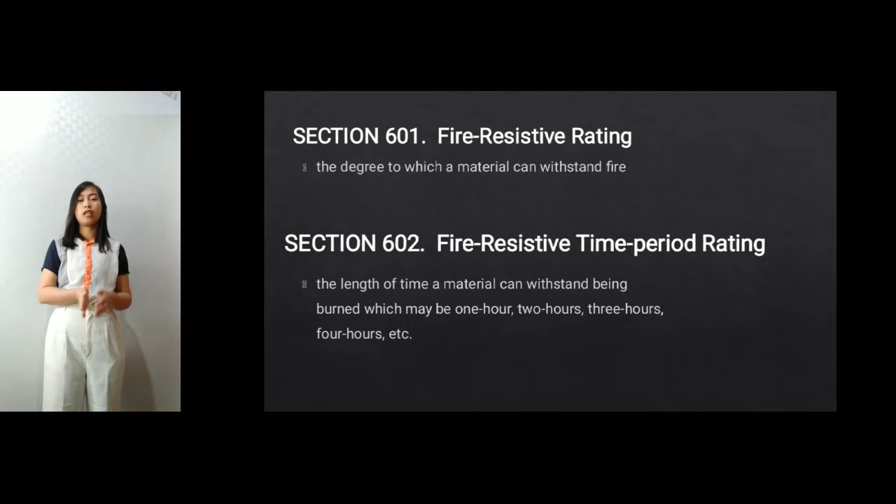In Section 603, fire resistive standards: what are the standards of the fire resistive method? All materials of construction and assemblies, or combination thereof, shall be classified according to their fire retardant or flame spread ratings. This is also determined by generally accepted testing methods and/or by the secretary or the building officials of the Philippines.

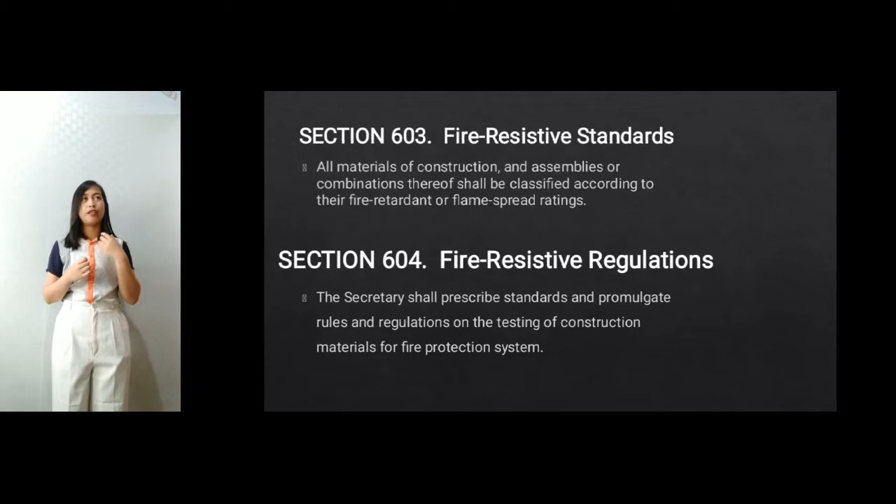Section 604 is the fire resistive regulations. This section states that the secretary shall prescribe standards and promulgate rules and regulations on the testing of construction materials for fire protection systems. We also have the Fire Code of the Philippines, which is a separate document that states all the standards and testing methods that should be followed in the Philippines when we talk about fire safety.

How about passive fire protection? It is often not noticed, but it is a critical element in fire protection. Passive fire protection consists of elements utilized to keep a building safe so fire doesn't spread, and no action is needed for it to work. These systems are built inside the building, usually consisting of fire resistant floors and walls.

Let's move on to Chapter 7. This chapter talks about the classification and general requirement of all buildings by use or occupancy. Before we proceed, let us first know what are the classifications of buildings by occupancy.

There are different occupancies that a building can have: group A, B, C, up until group J. Group A is for residential dwellings. Group B is for residentials, hotels, and apartments. Group C is education and recreation. Group D is institutional. Group E is business and mercantile. Group F is industrial. Group H is assembly other than group I, and Group I is assembly with occupant load of 1,000 or more, and Group J is for accessory buildings.

Is it allowed to change the occupancy use of a building? What does it mean? It means that when a certain building has a certain occupancy, is it allowed to change that occupancy to another one? For example, group A to group J.

Section 702 states that no change shall be made in the character of occupancy or use of any building which would place the building in a different division of the same group of occupancy, or in a different group of occupancy, unless such building is made to comply with the requirements of this code for such division or group of occupancy. This means that if a building is designed to be residential, it should function as a residential building. It should not function as an industrial, mercantile, or accessory building.

However, if a change must be applied in the building, it should comply with the requirements given by the secretary or the building officials.

Next is mixed occupancy in section 703. What is mixed occupancy? There are different subcategories under mixed occupancy, section 703. First is the general requirements: the whole building shall be subject to the most restrictive requirement pertaining to any type of the occupancy. So it would be possible to mix the occupancy of the building.

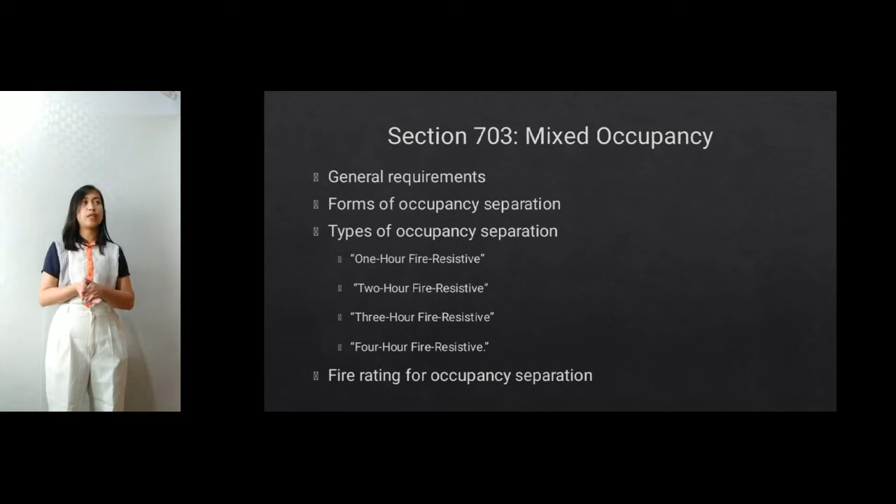Now, fire rating for occupancy separation. Where any occupancy separation is required, the minimum shall be a 1-hour fire resistive occupancy. So if a different part of a building is adjacent to another part of the building that has another occupancy, there must be a separation between them, and that separation should have a minimum fire rating of 1-hour fire resistive occupancy separation.

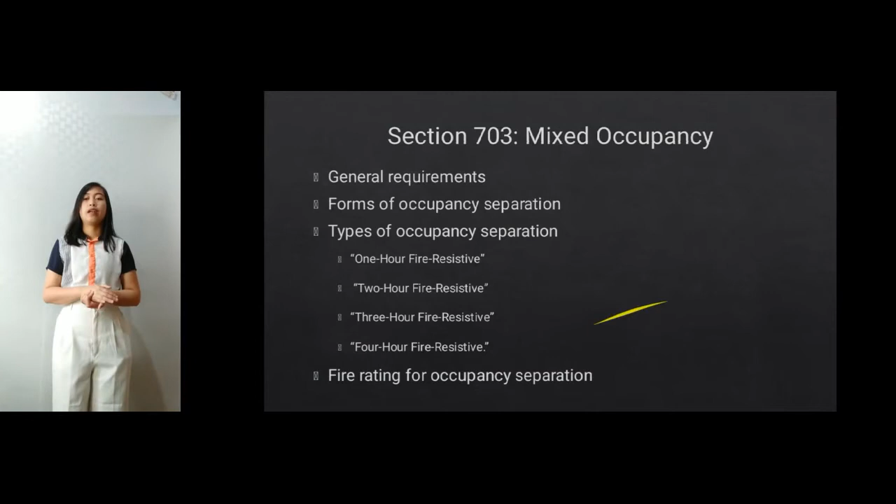Okay, so next is section 704, the location on property. In general, there has to be direct access to a public space, yard, or street on at least one of its sides. So a property must have direct access to public space.

Eaves over required windows shall not be less than 750 millimeters from the side and rear property line. Eaves are the border of the roof, so the distance between the border of the roof and the property line must not be less than 750 millimeters.

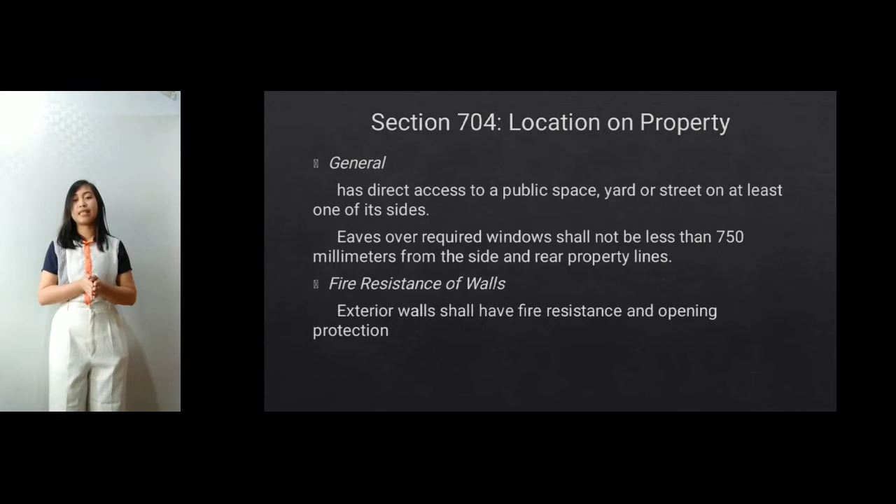Next is fire resistance of walls. Exterior walls shall have fire resistance and opening protection. When openings in exterior walls are required to be protected due to distance from property line, the sum of the areas of such openings in any story shall not exceed 50% of the total area of the wall in that story.

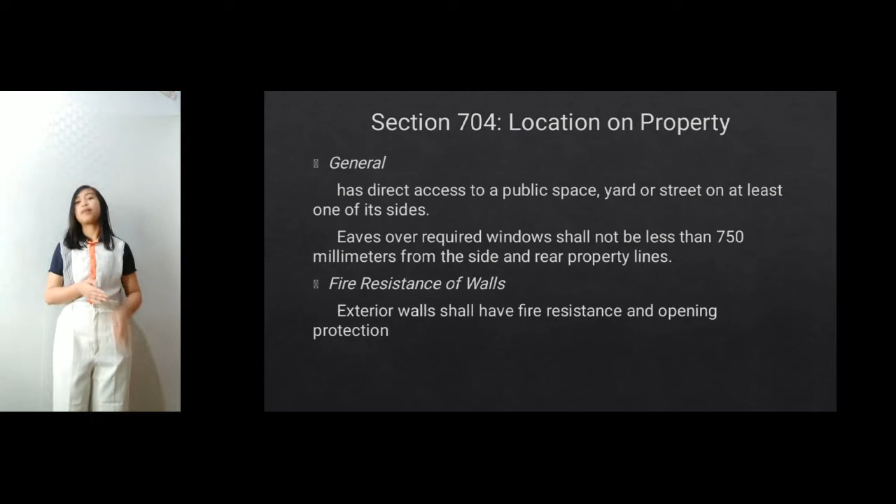Also under location on property: buildings on same property and buildings containing courts. If you will be designing these types of buildings on the same property, court walls shall be assumed to have a property line between them. So you should have a clear property line on your property, setting a clear separation to the property beside yours.

Next is section 705, the allowable floor areas. The allowable floor areas depend on the occupancy and type of buildings, as set by the secretary, and the allowable floor area increases according to the building code. This should also comply with the requirements of the secretary.

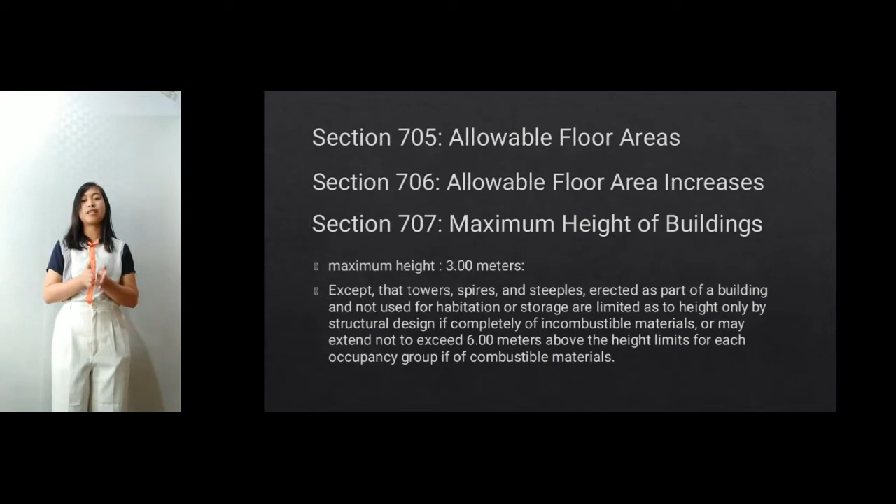In section 707, the maximum height of buildings shall be 3 meters, with an exception: towers, spires, and steeples erected as part of the building and not used for habitation or storage are limited as to height only by structural design if completely of incombustible materials, or may extend not to exceed 6 meters above the height limits for each occupancy group if of combustible materials.

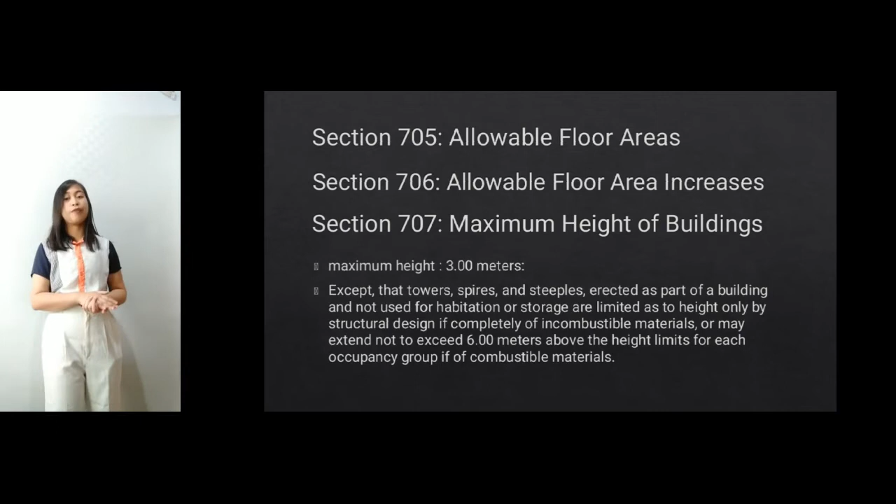So it simply states that if it's not for habitation or storage, you can exceed your maximum building height according to your structural design, provided that it should be made of incombustible materials as given in the code.

Section 708 covers the minimum requirements for Group A dwellings. Group A dwellings are the most commonly used - the majority of construction in the Philippines falls under Group A dwellings or residential. So we should know the minimum requirements for it.

For dwelling location and lot occupancy, this should be less than 90% for a corner lot, less than 80% for an inside lot. For easements or setbacks, there should be at least 2 meters from the property line.

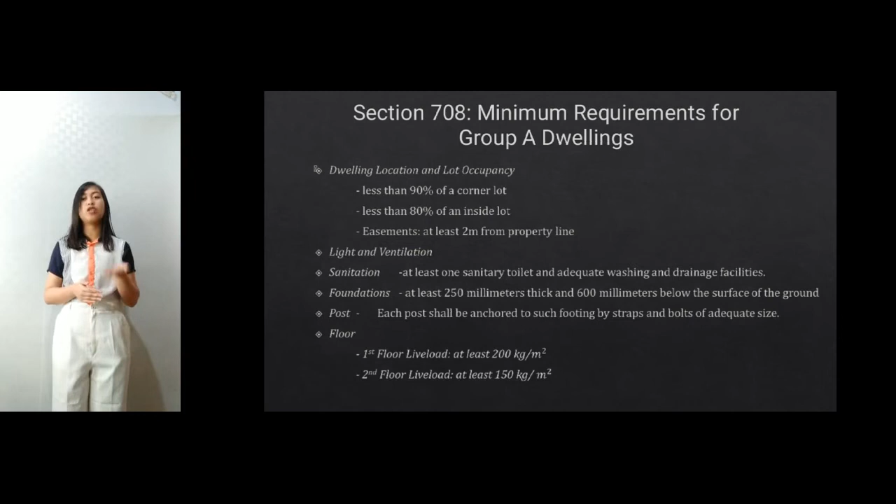For light and ventilation, we will discuss that more in chapter 8. For sanitation, there should be at least one sanitary toilet and adequate washing and drainage facilities.

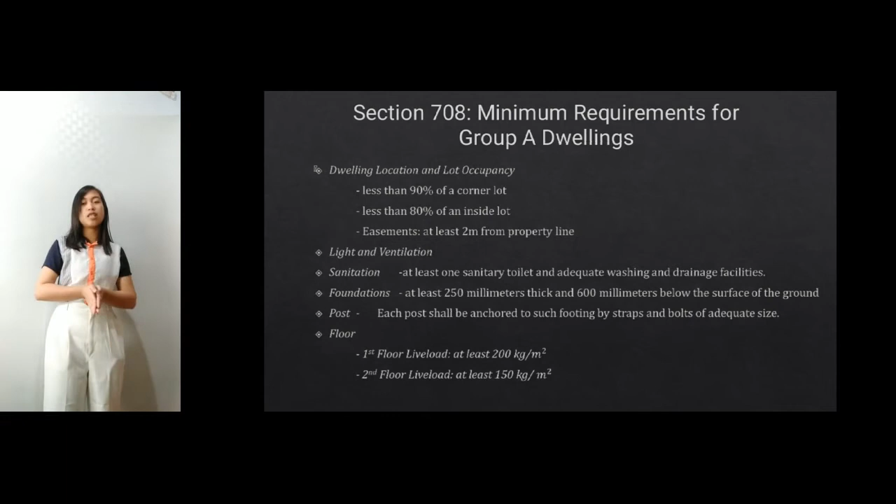For foundations, at least 250 millimeters thick and 600 millimeters below the surface of the ground. For posts, each post shall be anchored to such footing by straps and bolts of adequate size. For floors, the first floor live load must be at least 200 kg per square meter, and the second floor live load at least 150 kg per square meter.

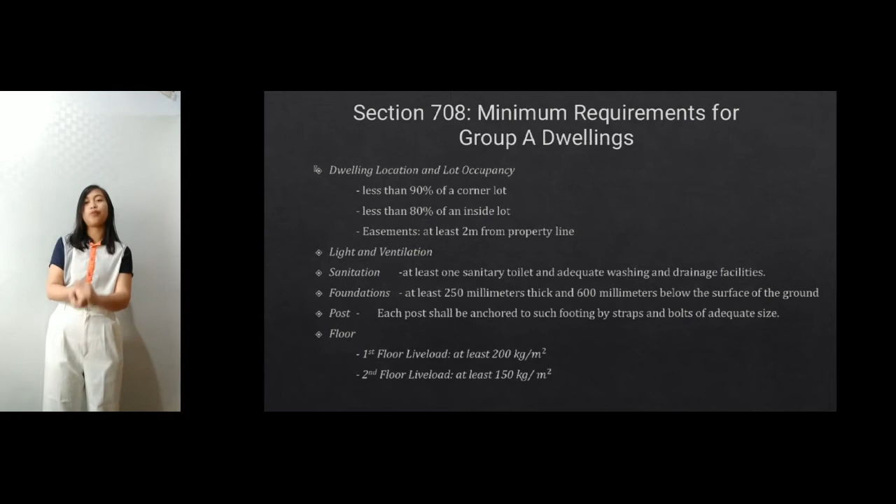Next is the roof. Roof wind load should be designed to resist at least 120 kilograms per square meter, or based on vertical projection.

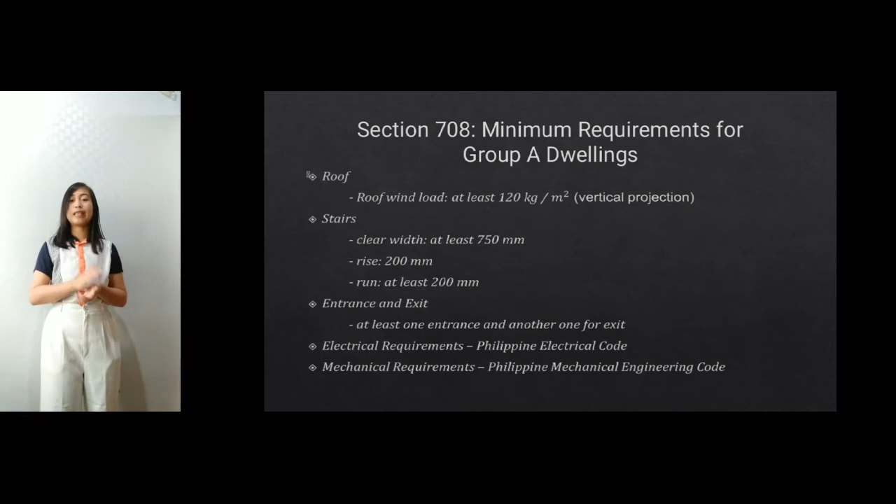Next is the stairs. The clear width of the stairs must be at least 750 millimeters, the rise must be 200 millimeters, and the run must be at least 200 millimeters. For entrance and exit, there should be at least one entrance and another for exit. Also, for electrical requirements we have the Philippine Electrical Code, and for mechanical requirements the Philippine Mechanical Engineering Code. That ends chapter 7.

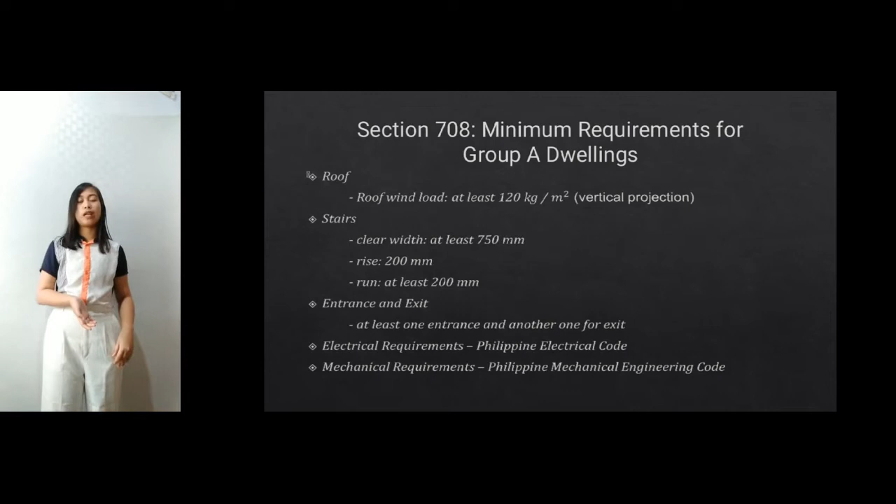Let's proceed to chapter 8, which talks about light and ventilation. For section 801, the general requirements, we should provide adequate light and ventilation of the buildings, and all buildings shall face a street, public alley, or private street which has been duly approved. Section 802 talks about the measurement of site occupancy.

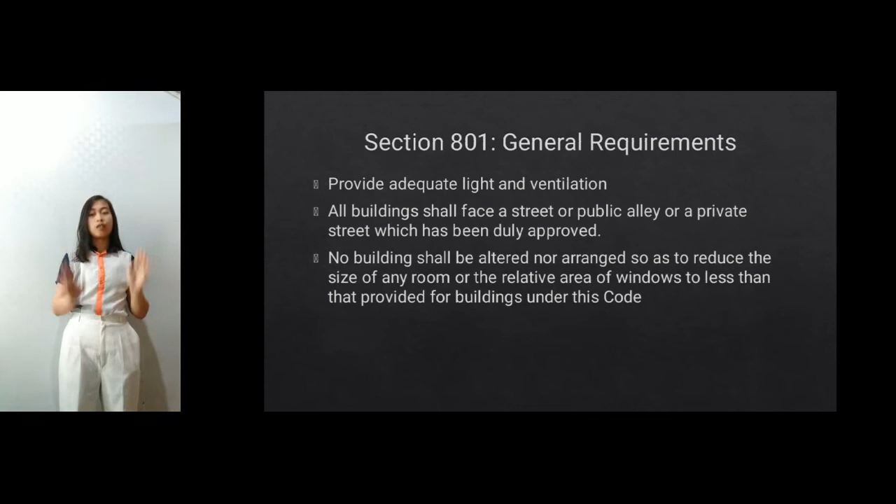It simply tells us that the occupancy is measured at the ground level. And for Section 803, it is the percentage of site occupancy. The minimum site occupancy shall be governed by the use, type of construction, and height of the building, and the use, area, nature, and location of the site.

For Section 804, it talks about the size and dimension of courts. The minimum horizontal dimension of courts shall be not less than 2 meters, and all inner courts shall be connected to a street or yard either by a passageway with a minimum width of 1.2 meters, or by a door through a room or rooms.

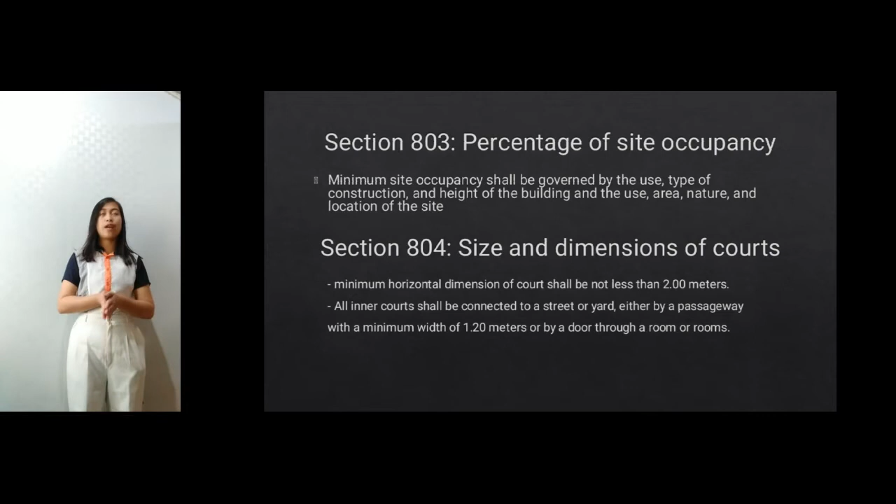Next is Section 805, this is about ceiling heights. So for buildings with artificial ventilation, the habitable rooms must have a minimum ceiling height of 2.4 meters. For more than one story, the first story must be a minimum of 2.7 meters.

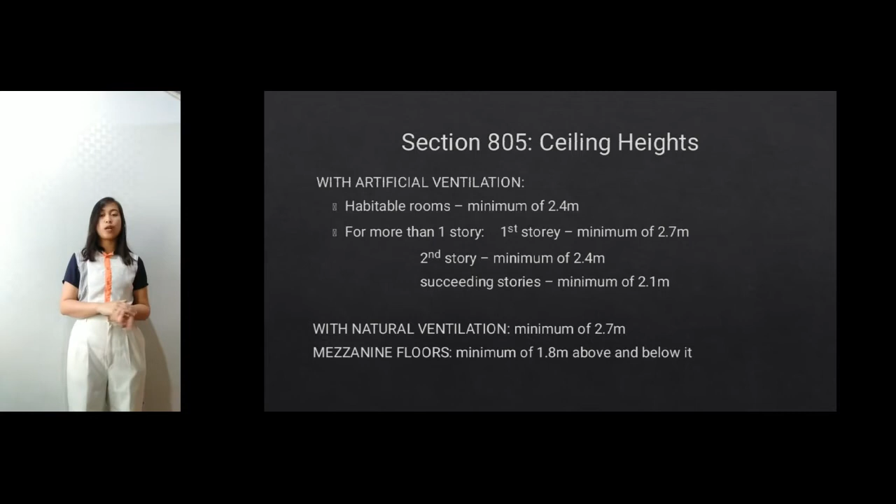The second story must be a minimum of 2.4 meters, and the succeeding stories must have a minimum ceiling height of 2.1 meters. For buildings with natural ventilation, it should have a minimum of 2.7 meters ceiling height. For mezzanine floors or low ceiling story, it should have a minimum of 1.8 meters above and below its floor.

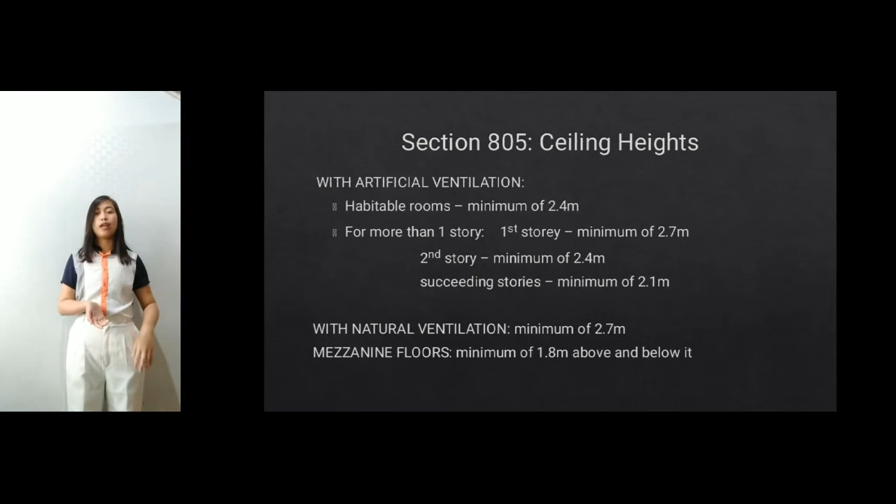For Section 806, the size and dimension of rooms. Rooms for human habitation must be 6 square meters with at least a dimension of 2 meters. For kitchens, 3 square meters with at least 1.5 meters. For bath and toilet, it should be 1.2 square meters with a least dimension of 0.9 meters.

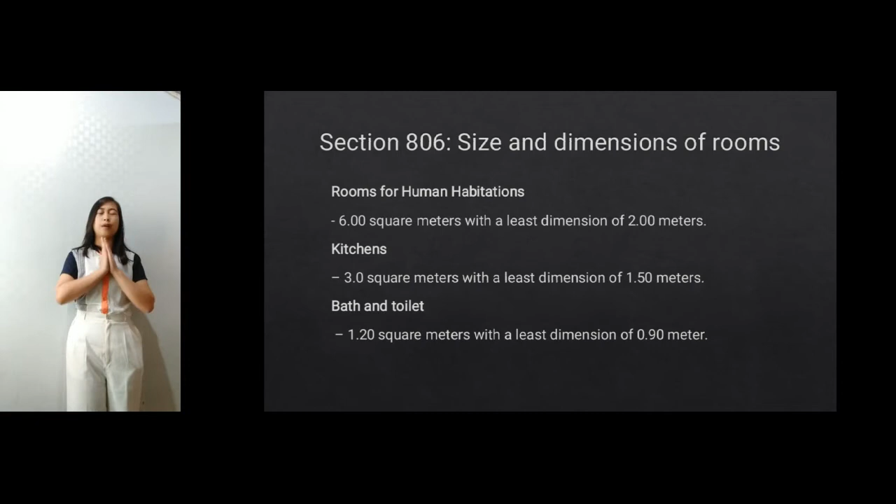So these are the minimum standards. So you can exceed the area of these rooms, but you can never go below this area.

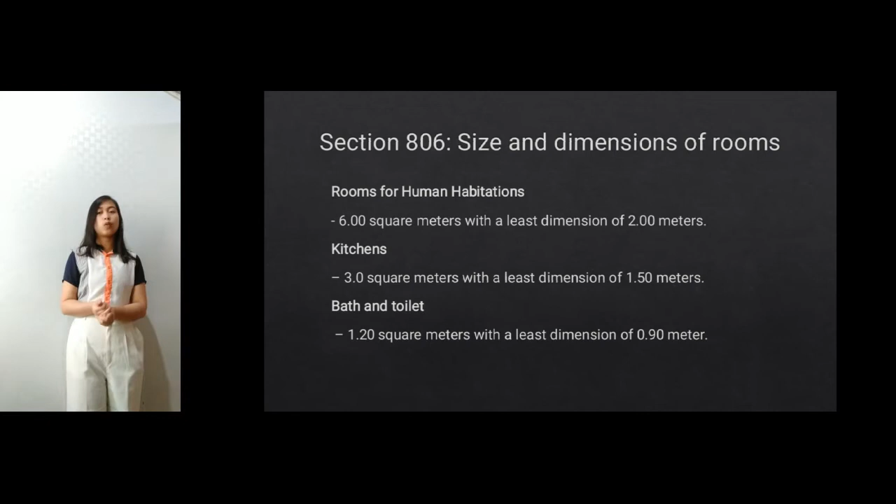For Section 807, it is airspace requirements in determining the size of rooms. For number 1, for school rooms, it should be 3 cubic meters with 1 square meter of floor area per person. For number 2, workshops, factories, and offices, 12 cubic meters of airspace per person. And habitable rooms, 14 cubic meters of airspace per person.

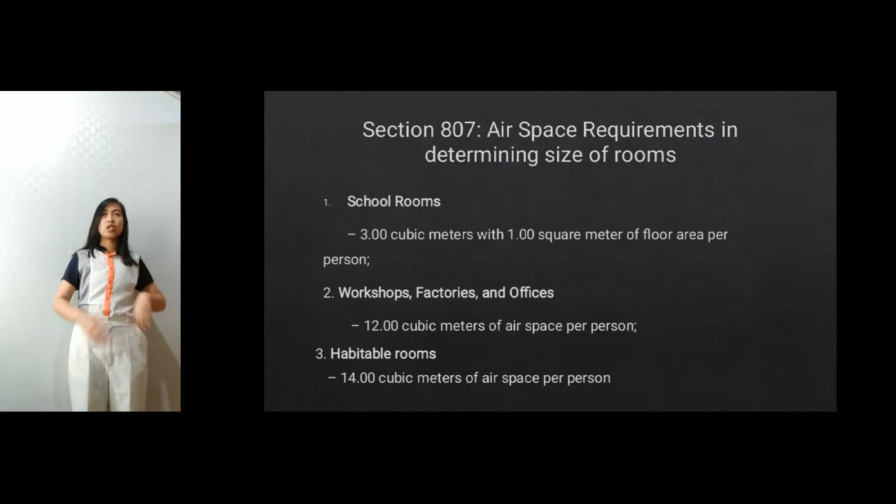For Section 808, or the window openings, if artificial ventilation is not provided, window openings shall have a total free area of at least 10% of the floor area of a room. This is for buildings where artificial ventilation is not provided.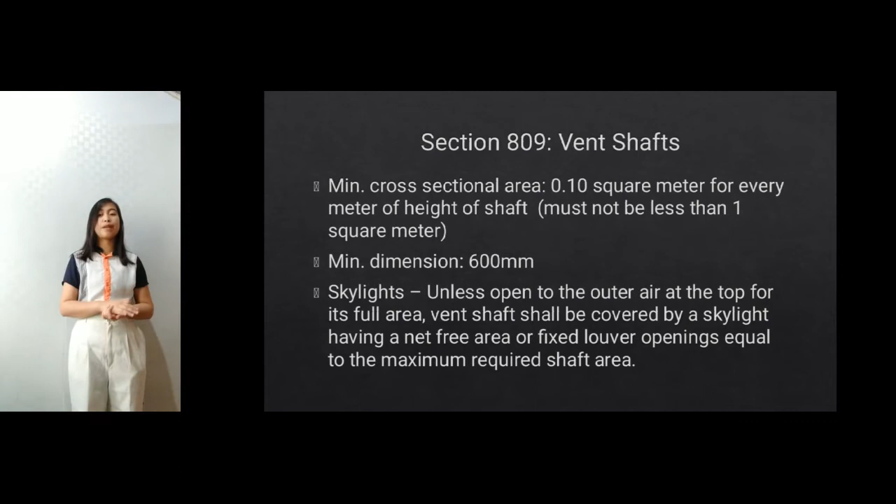Next is Section 809, this talks about the vent shafts. The minimum cross-sectional area is 0.1 square meter for every meter of height of shaft. Must not be less than 1 square meter. The minimum dimension must be 600 millimeters.

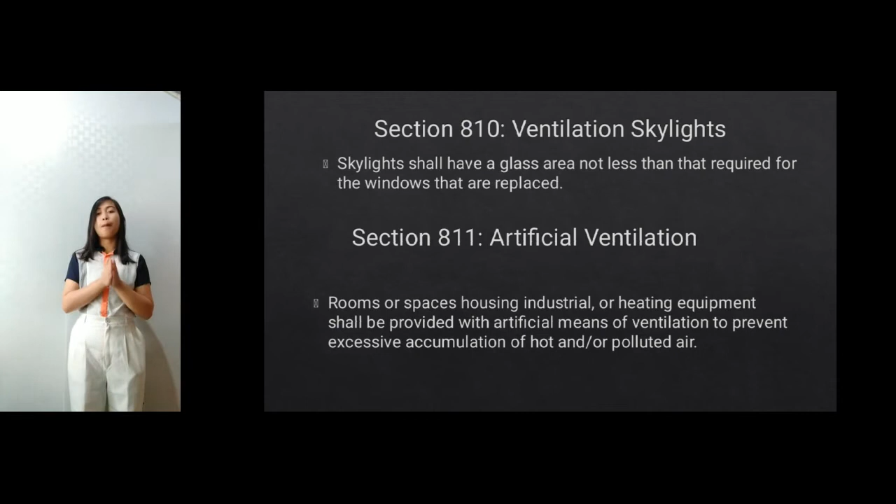For Section 810, the ventilation skylights, the skylights shall have a glass area not less than that required of the windows that are replaced. They shall be equipped with removable sashes or louvers with an aggregate net free area not less than required for opening parts of the window that are replaced, or provided with approved artificial ventilation of equivalent effectiveness.

For Section 811, the artificial ventilation. Rooms or spaces housing industrial or heating equipment shall be provided with artificial means of ventilation to prevent excessive accumulation of hot and or polluted air. That ends chapter 8.

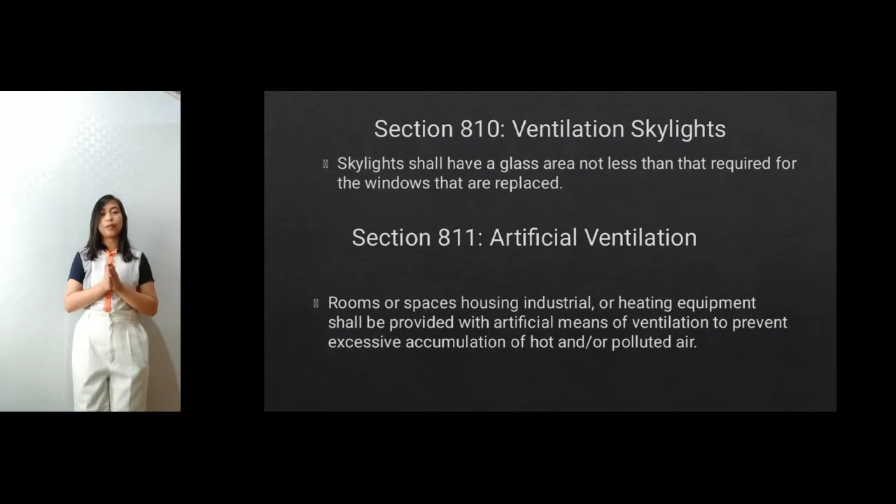Moving on to chapter 9, or the sanitation. For Section 901, the general requirements, it states that all buildings hereafter erected, altered, remodeled, relocated, or repaired for human habitation shall be provided with adequate sanitation.

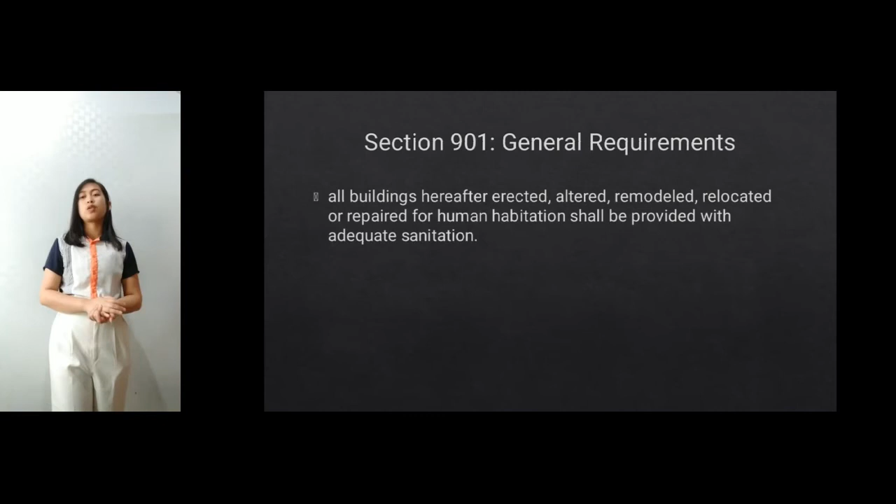For Section 902, the water supply system. Where should we get the water supply for our buildings? The potable water shall be supplied from existing municipal or city waterworks system. Also, the quality of drinking water from meteoric, surface, or underground sources shall conform to the criteria set in the latest approved national standards for drinking water.

Also, the design, construction, and operation of deep wells for the abstraction of groundwater shall be subject to the provision of the Water Code of the Philippines. The design, construction, and operation of independent waterworks systems, private housing, subdivisions, or industrial estates shall be governed by existing laws relating to local waterworks system. And the water piping installation inside buildings and premises shall conform to the provisions of the National Plumbing Code of the Philippines.

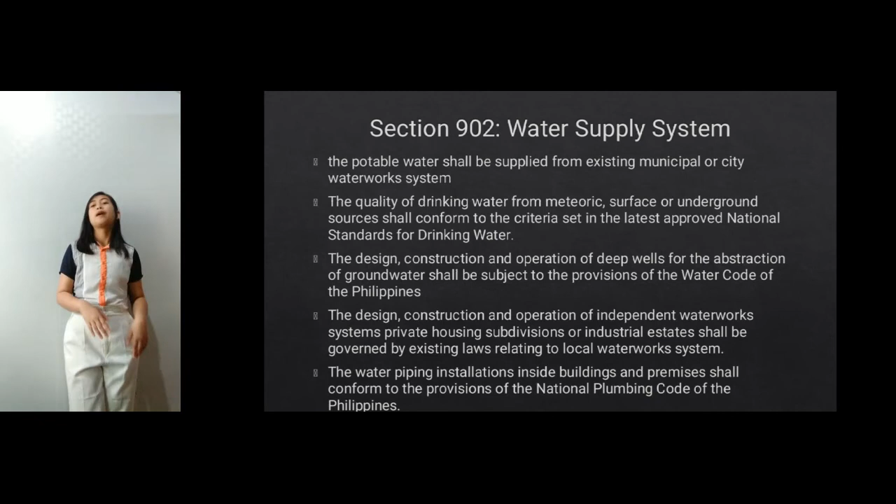For Section 903, the wastewater disposal system. The wastewater shall be discharged directly into the nearest street sanitary sewer. And all buildings located in areas where there are no available sanitary sewerage system shall dispose their sewage Imhoff or septic tank and subsurface absorption field.

Okay, so it is an alternative if the municipal street sewer is not available. For sanitary and industrial plumbing installation inside buildings and premises, it shall conform to the provisions of the National Plumbing Code. Section 904 is the storm drainage system.

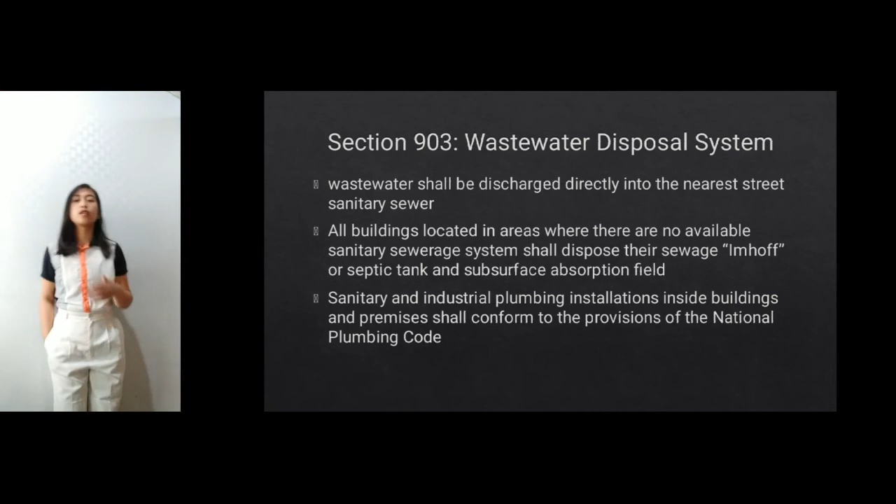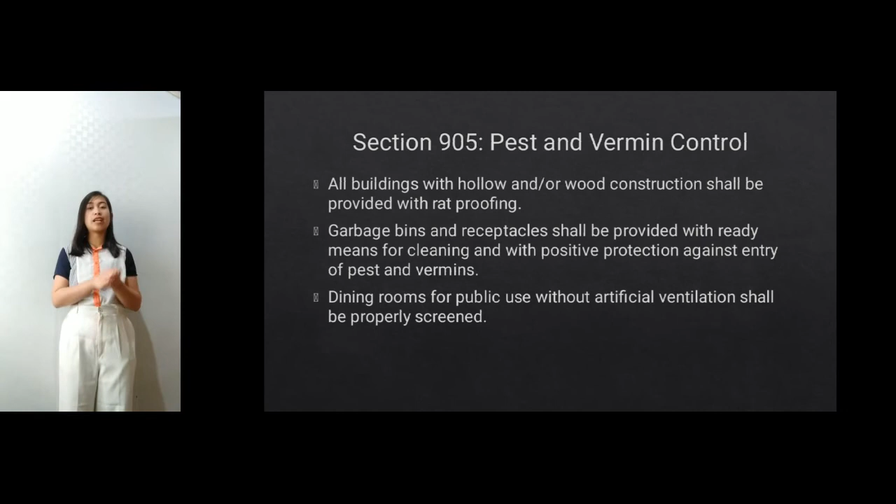Rainwater drainage shall not discharge to the sanitary sewer. For Section 905, the pest and vermin control: all buildings with hollow and wood construction shall be provided with rat proofing. Garbage bins and receptacles shall be provided with ready means for cleaning and with positive protection against entry of pests and vermin. Dining rooms for public use without artificial ventilation shall be properly screened.

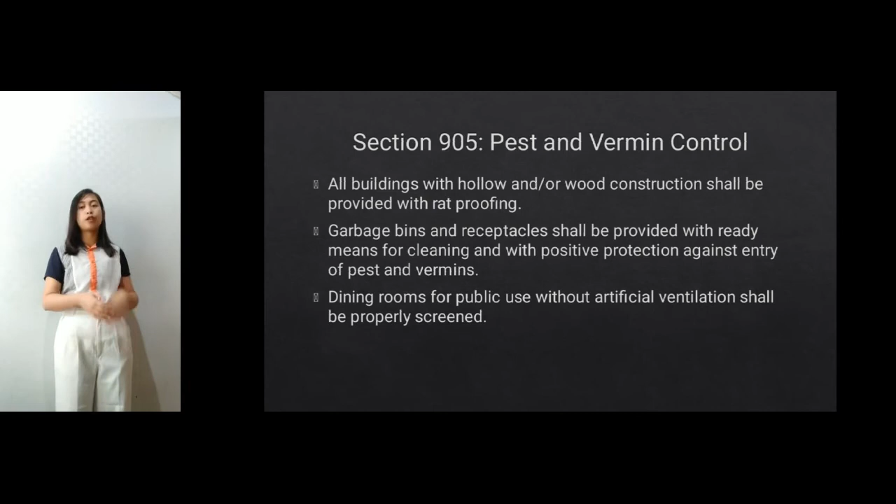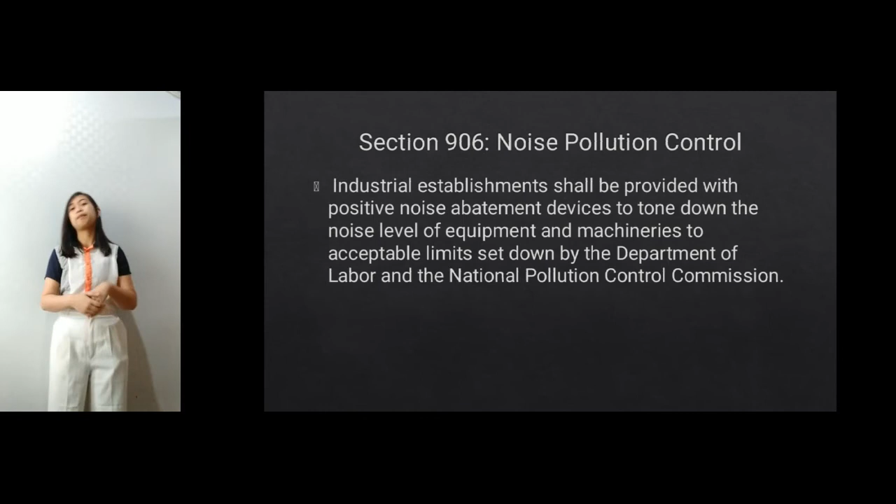For Section 906, the noise pollution control: industrial establishments shall be provided with positive noise abatement devices to tone down the noise level of equipment and machineries to acceptable limits set down by the Department of Labor and the National Pollution Control Commission. For Section 907, pipe materials: all pipe materials to be used in buildings shall conform to the standard specifications of the Philippine Standard Council. So that ends Chapter 9.

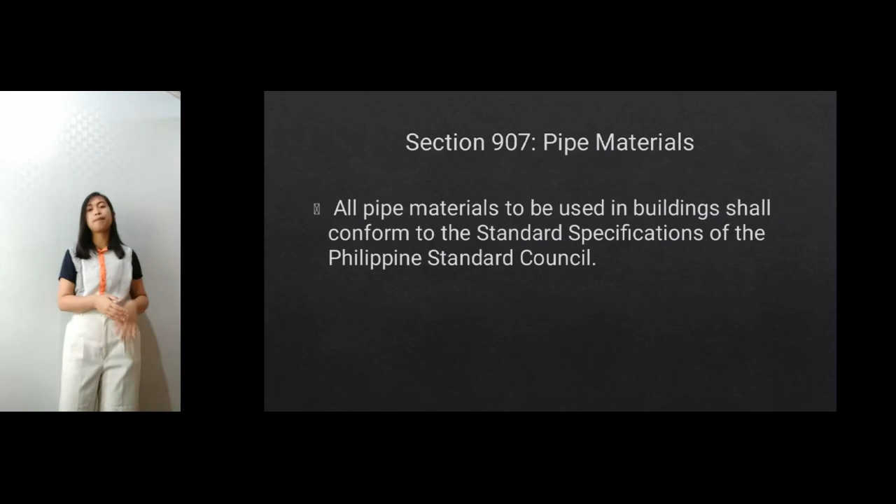Let's proceed to Chapter 10, building projections over public streets. For Section 1001, the general requirements: no part of any building or structure or any of its appendages shall project beyond the property line of the building site.

Dapat dili jud mo lapas sa property line ang sa building. For Section 1002, projection into alleys or streets: footings located at least 2.4 meters below grade along national roads or public highways may project not more than 300 millimeters beyond the property line.

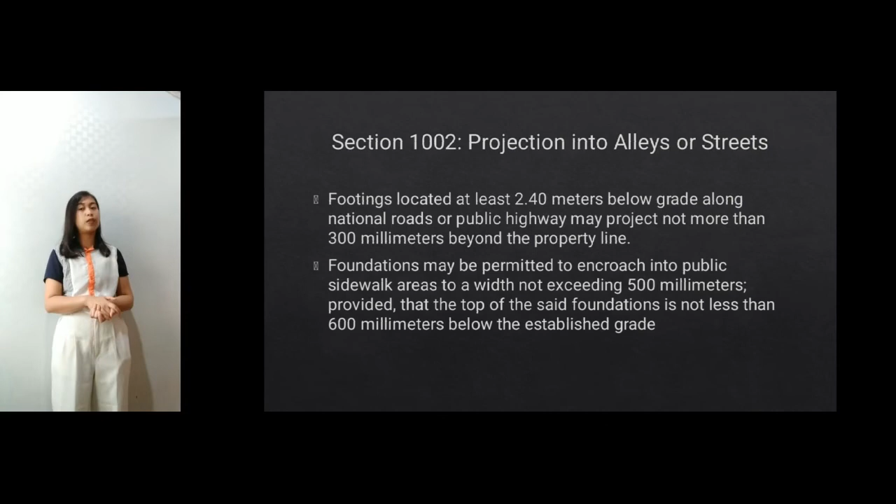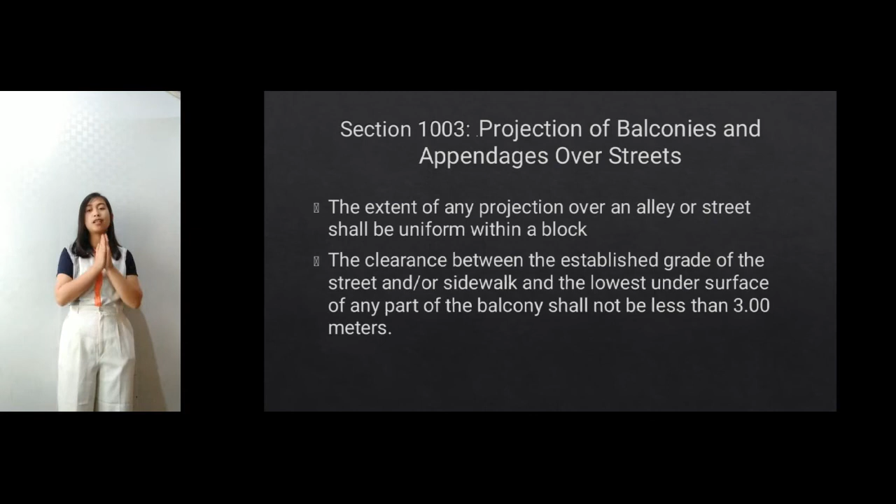For Section 1003, projection of balconies and appendages over streets: the extent of any projection over an alley or street shall be uniform within a block. The clearance between the established grade of the street and/or sidewalk and the lowest undersurface of any part of the balcony shall not be less than 3 meters.

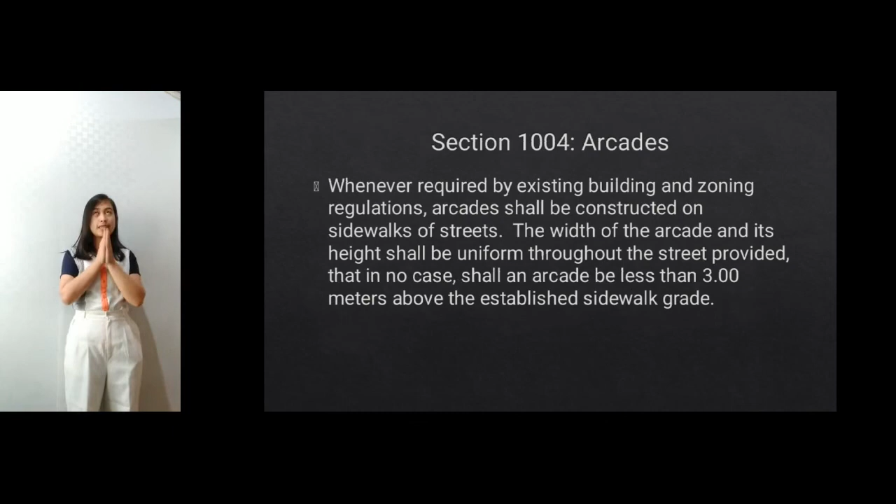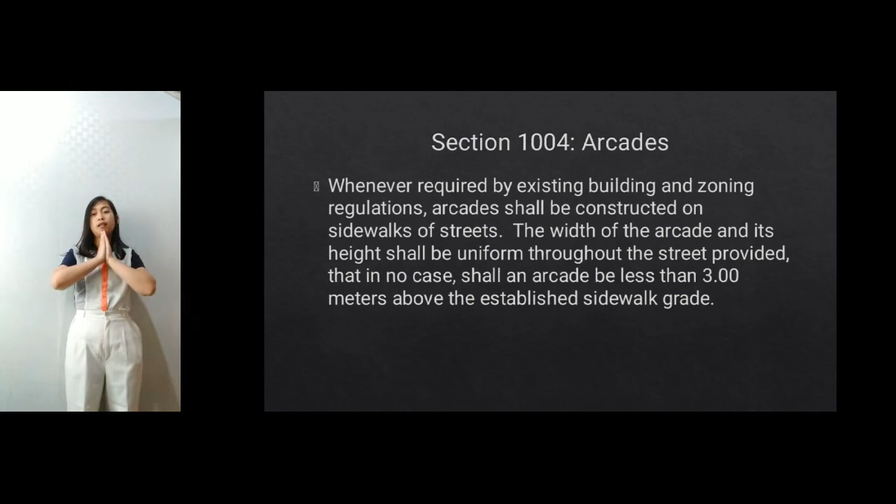Next is for the arcades. Whenever required by existing building and zoning regulation, the arcade shall be constructed on sidewalks of streets. The arcade shall not be less than 3 meters above the established sidewalk grade.

Projection and clearance: the horizontal clearance between the outermost edge of the marquee and the curb line shall not be less than 300 millimeters, and it must be made of incombustible materials. Also, every marquee should be located so as not to interfere with the operation of any exterior standpipe connection or to obstruct the clear passage from the stairway exits of the building or the installation or maintenance of electroliers.

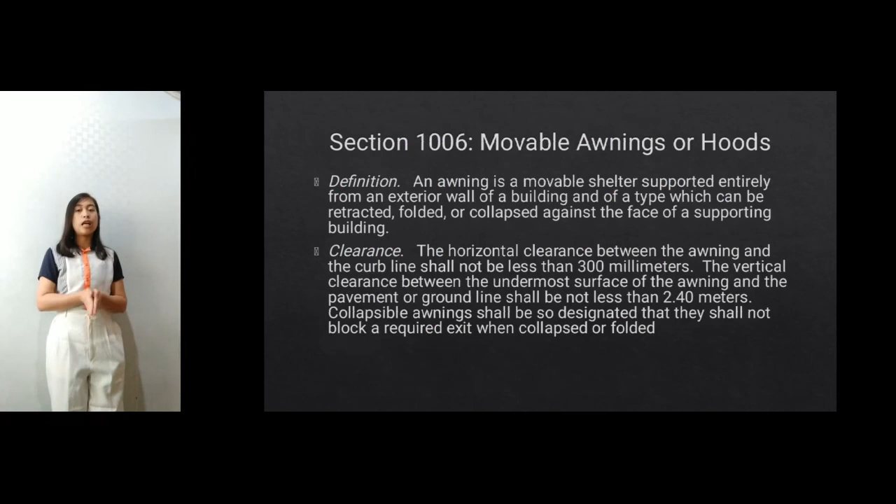The horizontal clearance between the awning and the curb line shall not be less than 300 millimeters, and the vertical clearance between the undermost surface of the awning and the pavement or ground line shall not be less than 2.4 meters. Collapsible awnings shall be so designed that they shall not block a required exit when collapsed or folded.

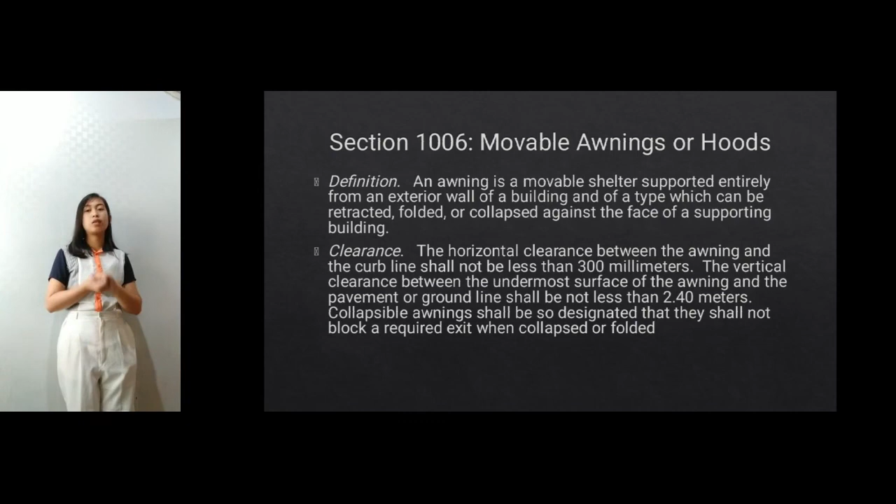Every corner building or solid fence on a public street or alley less than 3.6 meters in width shall be truncated at the corner.